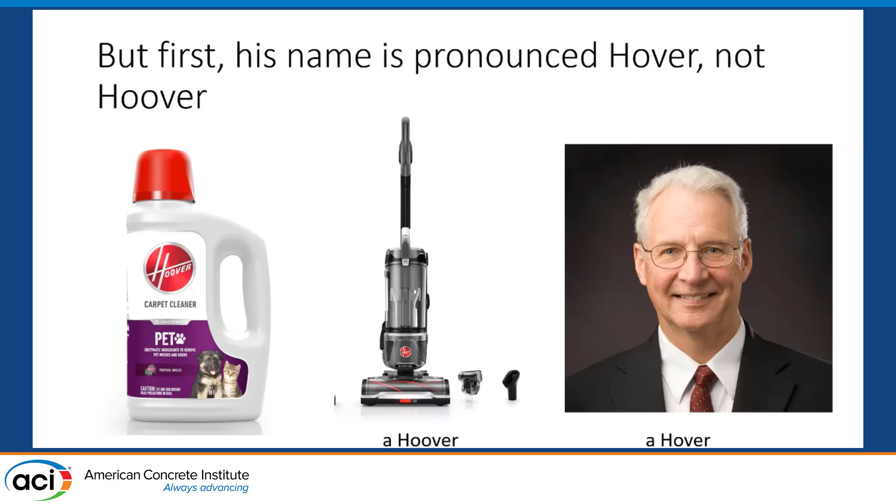Anyway, I was lucky enough to work with John and Ken under a P2P project for NRMCA, almost 20 years ago. And we're three wearing ties. Anyway, we were involved for several years doing several reports for P2P. And we had several meetings where Ken came up to Toronto and we sat in John Bickley's office, and then one time we met in, I think, Batavia, New York on the highway in a dirty motel for 3 days doing the same thing. So it was a lot of fun. We laughed a lot.

So anyway, we did these reports, and these are quotes from some emails that I got from Ken at the time. He says, it's a beautiful thing. And we've got paternity and custody of that report. And he says, reading pleasure, in case you have trouble sleeping, you can put this report in your nightstand, and it'll do the job, you'll wake up refreshed. But anyway, we had a lot of fun doing these reports, and it was always fun to get an email.

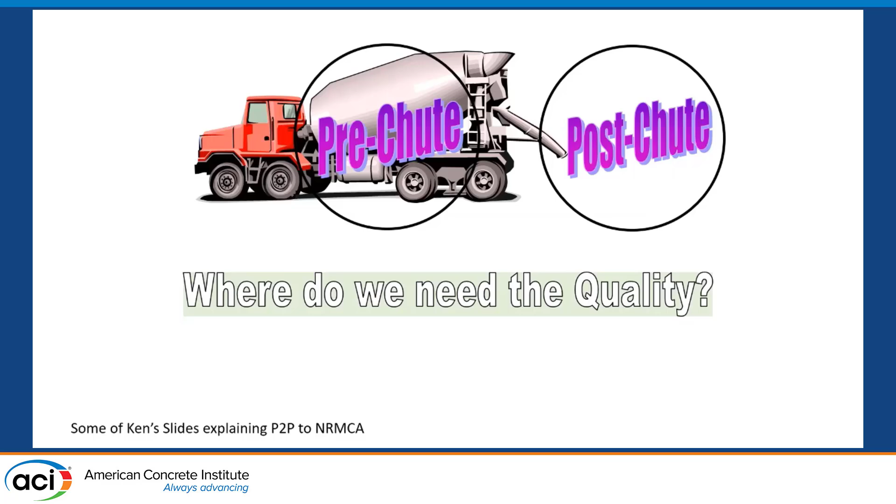So the title comes from a slide presentation that Ken made to SDC, I believe in Niagara-on-the-Lake, way back, when we were first starting this, and he talked about where do we need the quality, before the chute or after the chute? And he coined that post-chutimus concrete is what we're looking for. And he said there's a whole bunch of serial steps you have to go through to get post-chutimus concrete, the pre-chute steps, and then the post-chute steps. And all these things impact the performance of the concrete.

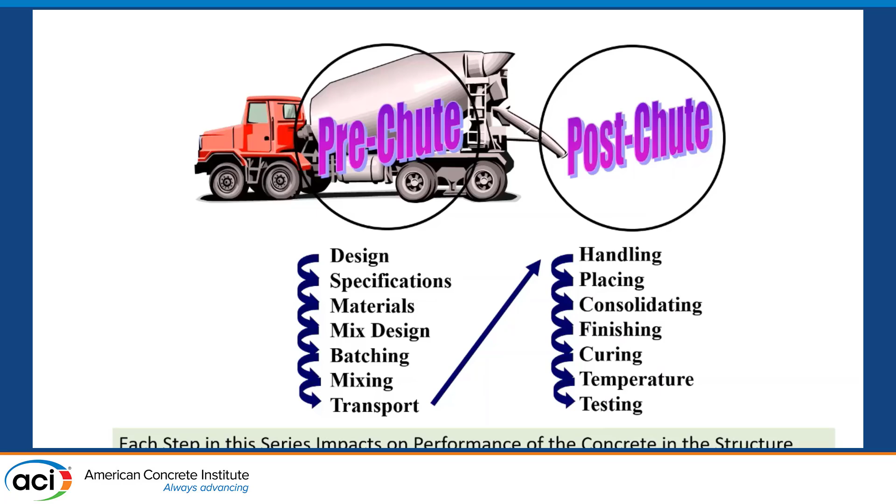And by the way, I didn't get the memo about 5 slides, so I got more slides. But seriously, there's a whole bunch of things that happen after the chute that impact quality. Who knew? And that becomes even more so now we're talking about low carbon concretes. There's a lot more things that have to be taken care of on the concrete on site.

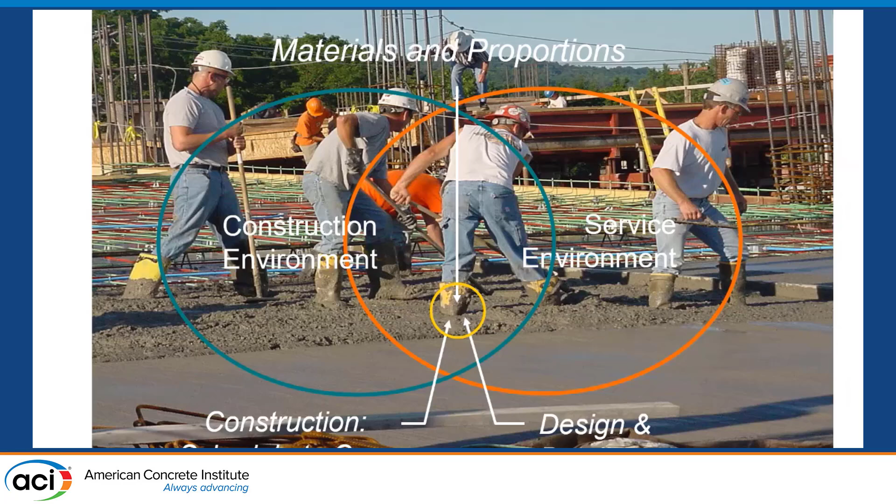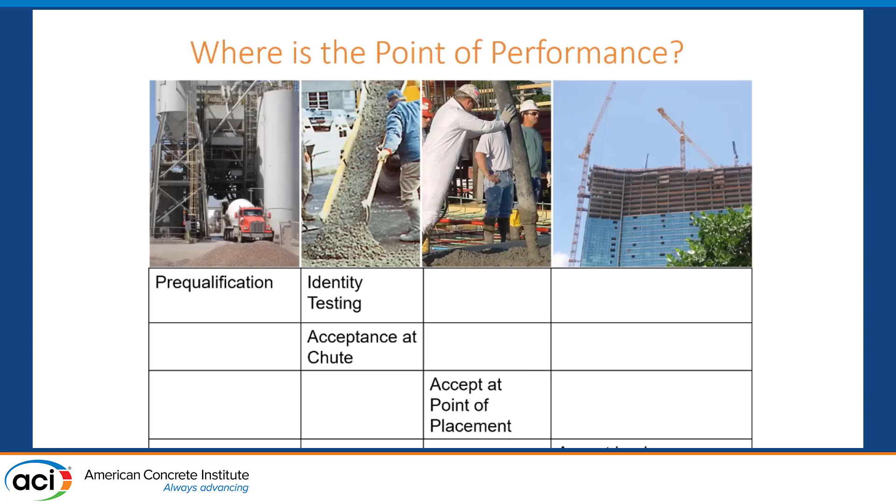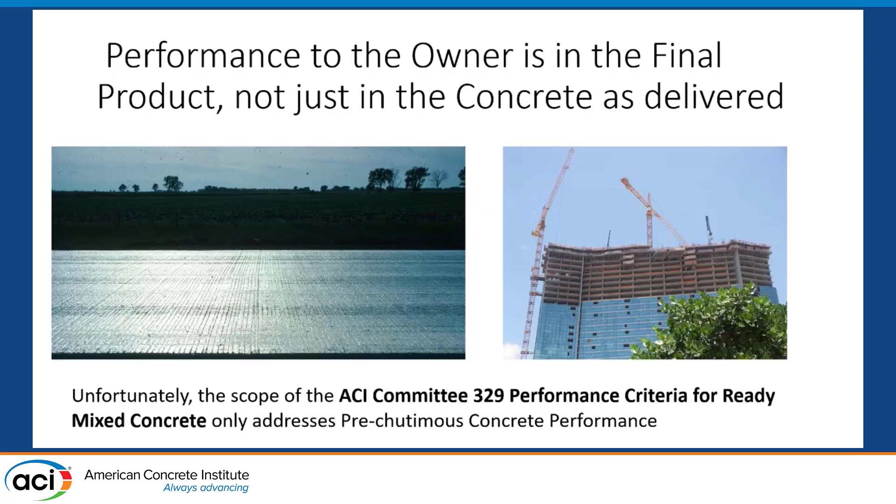So when we talk about P2P, John and Ken and I were talking about the one on the right, but our mentors at NRMCA were only interested in the second one. So it's pre-chutimus. And of course, the owner only cares about the post-chutimus concrete. And unfortunately, when 329 formed, they had an ITG and then formed ACI 329 on performance of concrete, their scope is to the end of the chute. There isn't a post-chutimus committee 329B. So that's one of the shortcomings.

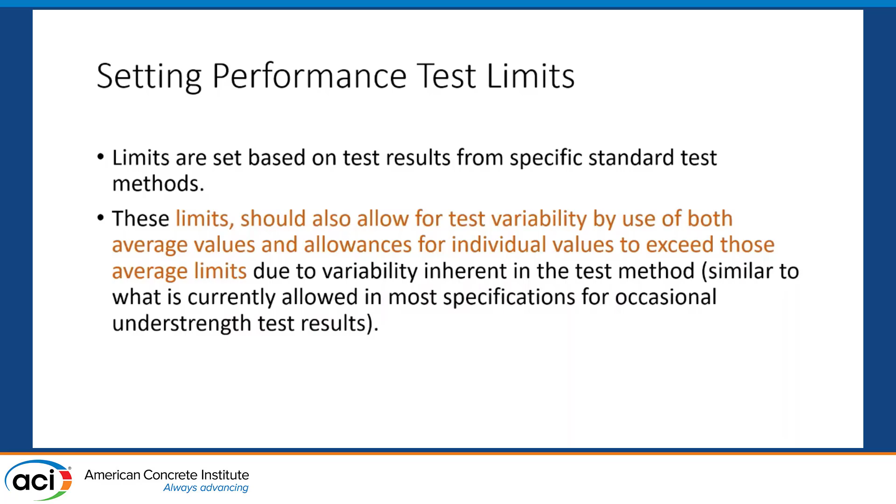Anyway, some of the things we talked about: if you're going to have performance testing, you have to have performance limits, and you need to allow for variability because all tests vary. It's the way we do it with strength. We allow for under-strength cylinders; you target a higher number than your f'c, and with in-place cores, if you don't make it, you do cores and you allow 0.85 of the f'c to be accepted.

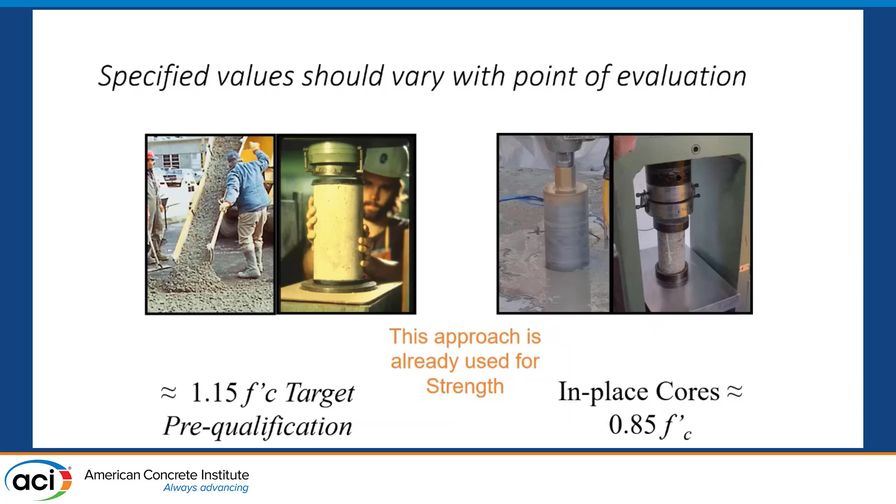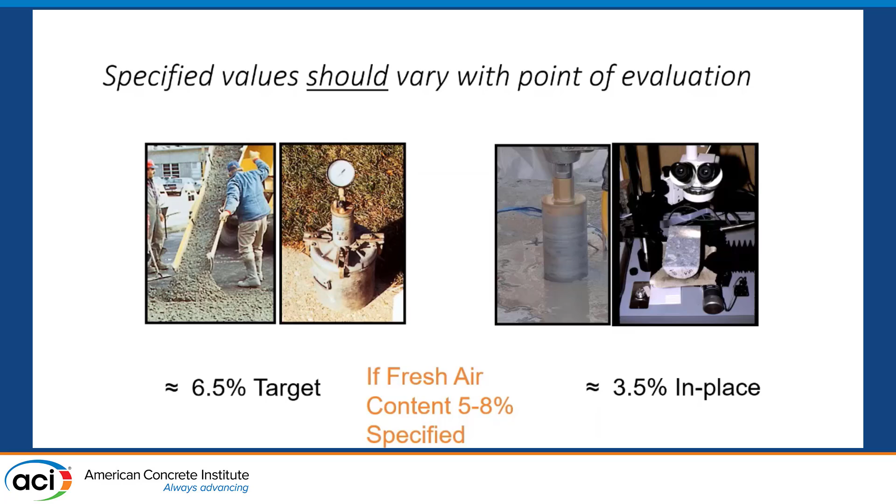And you can do the same thing with air content. With target air content, for concrete we place in Canada, we target 5 to 8, and a producer would probably target the midpoint, but you'll accept 3.5 in the hardened concrete. I think ACI actually allows 3, and the same thing if you're going to do hardened air voids, but that's post-chutimous.

We do that in Canada. We have a specified air content average spacing factor. A producer would target something less than that, but we'll accept a running average of that value with a higher single value because there's variability in the test results.

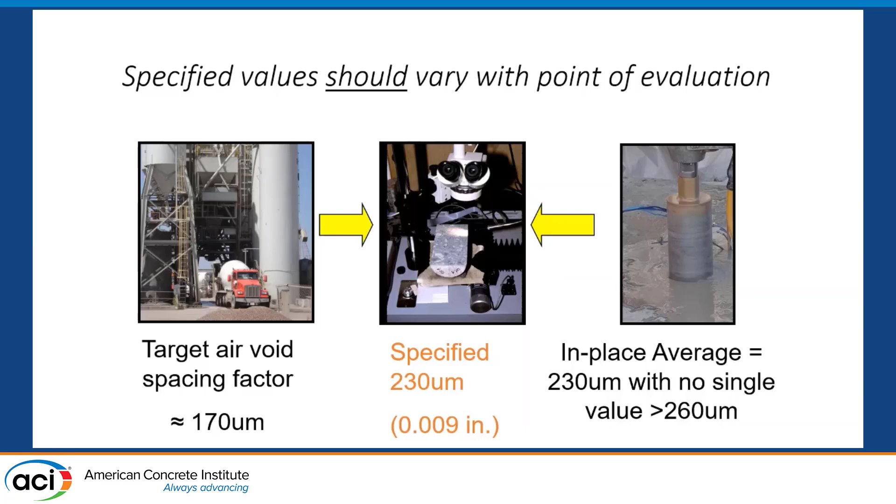So he's using the same approach if you're going to do performance in post-chutimous concrete, and we do the same thing in Canada for Coulomb limits for permeability, which we require for all the equivalent of ACI C2 concrete. So you'd have a specified limit, and you have a running average and single value that you accept for quality acceptance in the hardened concrete.

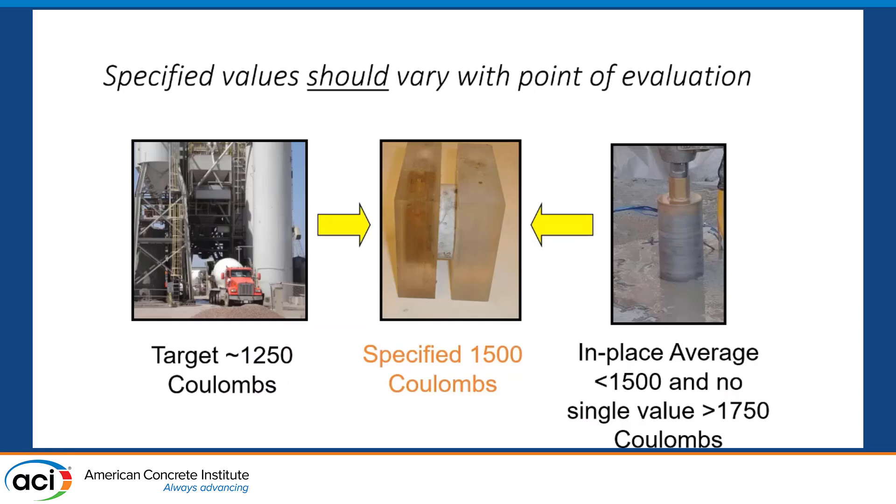And some of the things we talked about with post-chutimous performance is defining the roles and responsibilities of all the different players in this game as it moves down the line from concrete to contractor to owner. And so the Canadian standard actually has that. We actually have post-chutimous performance in the CSA standard.

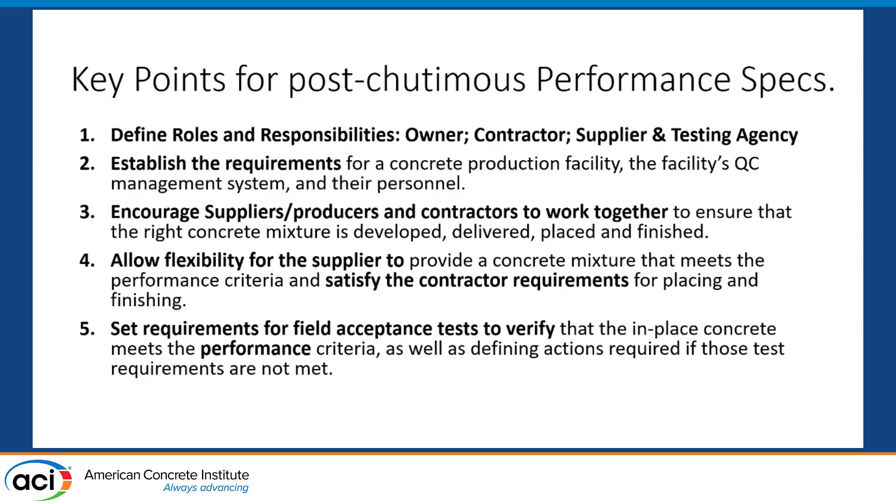And we include all these roles and responsibilities, establishing the requirements for the producer, encouraging the interaction between the contractor and the producers because they both impact on performance. And allowing that flexibility for performance allows them to do interesting things that they couldn't do in a prescriptive spec. Especially when you're talking about new types of concrete, low carbon concrete, performance specs will allow for more acceptance of that type of thing. And you've got to set requirements for the acceptance. Okay.

Everybody targets 28-day cylinder strengths cured in a laboratory on 6x12s, but that's not an adequate metric for performance. Construction doesn't care about 28 days. They care about when they can strip the thing. If you're doing vertical, they want to know when you can remove shoring. And so 28 days is not a good construct or metric for what we're interested in, and we need to move on from that.

And we allow for later age strengths for low carbon concretes to develop their properties, because 28 days is a Portland cement concept. It's not a concept for concretes with SCMs. And if you're going to put all your specs at 28 days for all the properties, you're not going to take up the value of those concretes that we're producing today.

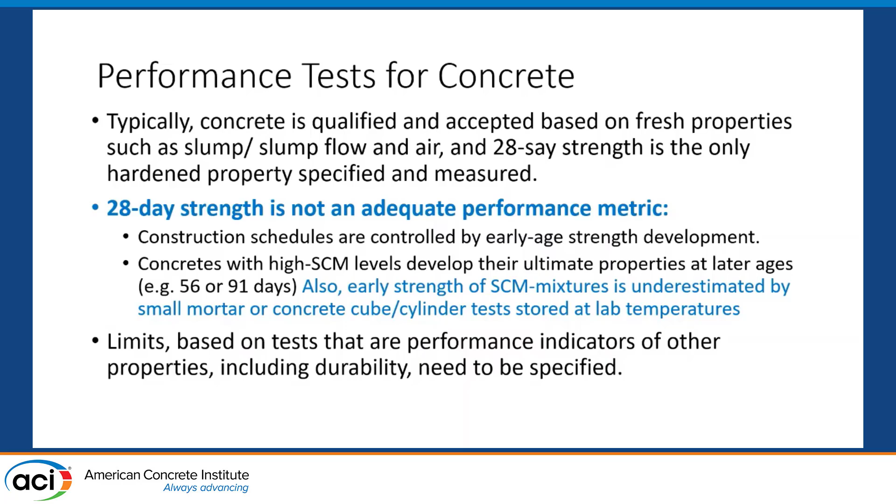And cylinders don't represent the structure. With these high SCM concretes, they say you reduce the early age performance, but that's only in those cylinders at a constant temperature. If you're building a structure with anything like a column or anything massive, they're developing strength way higher than that because they're thermally activated. So the cylinders in the lab do not represent that performance, and we need to think about that.

And we tried to introduce performance at 318, because right now C2 in 318 only requires 0.4 water binder ratio and 5,000 psi at 28 days. Neither one of those relates to durability, but that's the only requirement for concrete in a chloride exposure.

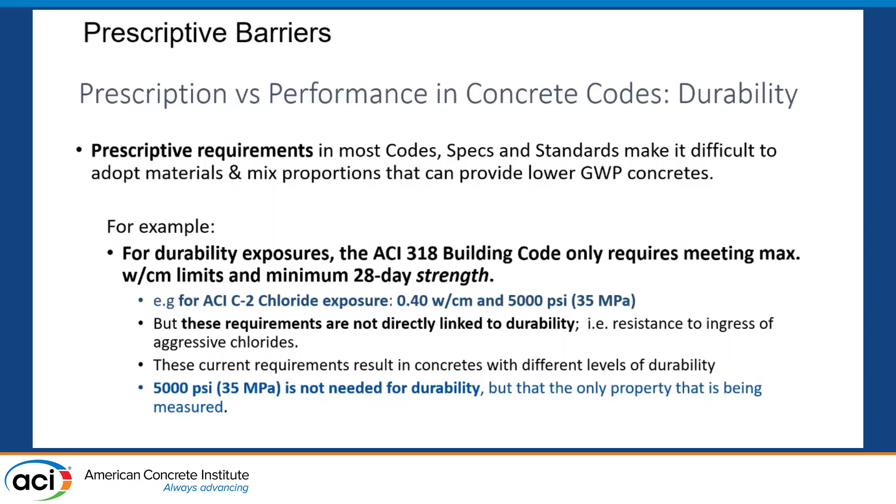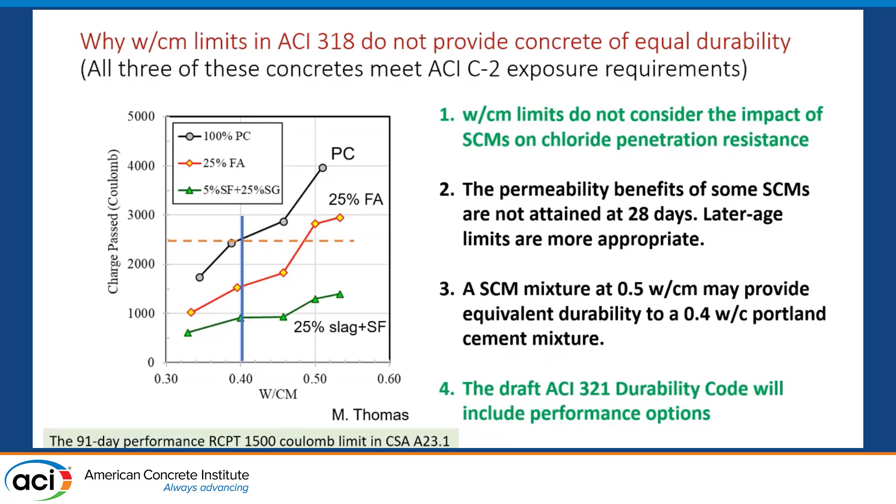We tried to do something about that, but there was a lot of resistance to adopting it, so the new code that will come out next year will still be 0.4 and 5,000 psi. We even tried to relax the water cement ratio and strength if you met a permeability limit, but that didn't fly. A lot of the pushback was because they don't trust the testing industry.

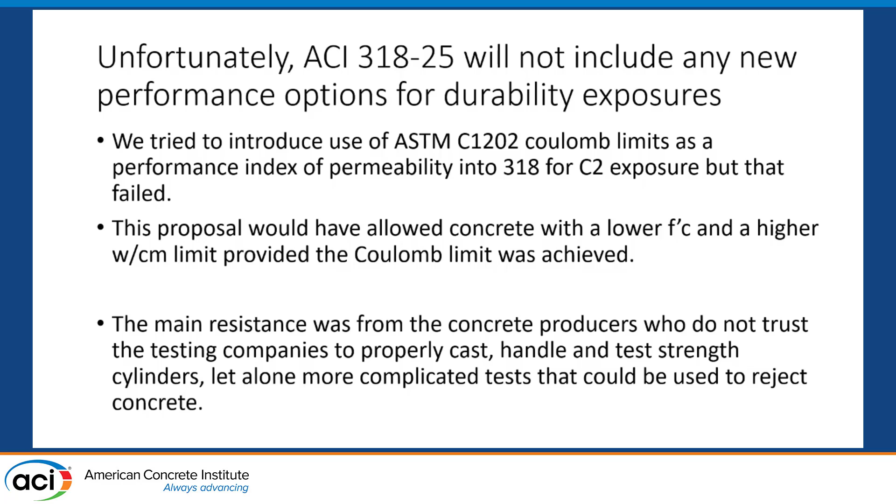The producers don't trust the testing industry. They say the testing of strength is bad enough, let alone more complicated tests. So that was a major part of the pushback, and that's unfortunate. And so that led Ken to be less than happy with post-Hooton.